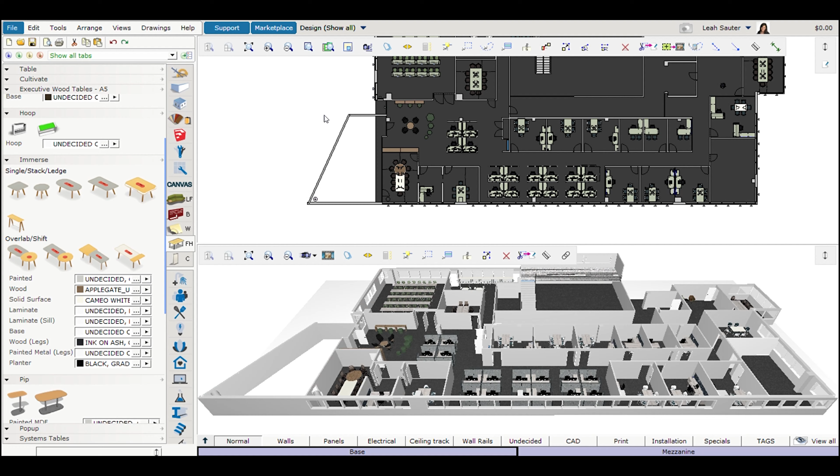So I just say make your drawing transferable to others, use clear communication. Now that we're in the CET drawing, I've identified some areas where the drawing tends to fail me as far as getting into the SIF accurately. One of those areas is finishes. I cannot seem to get it 100% of the time. I think I option everything out, I use schemes, and inevitably there's some little undecided finish somewhere in one of my symbols. This is very common, it happens a lot.

It basically takes you first being aware of this and caring, instead of going back into your SIF file and updating that finish, putting in the time up front and finishing it out right in that drawing. Just remember that as you go. Try to get in the habit of that.

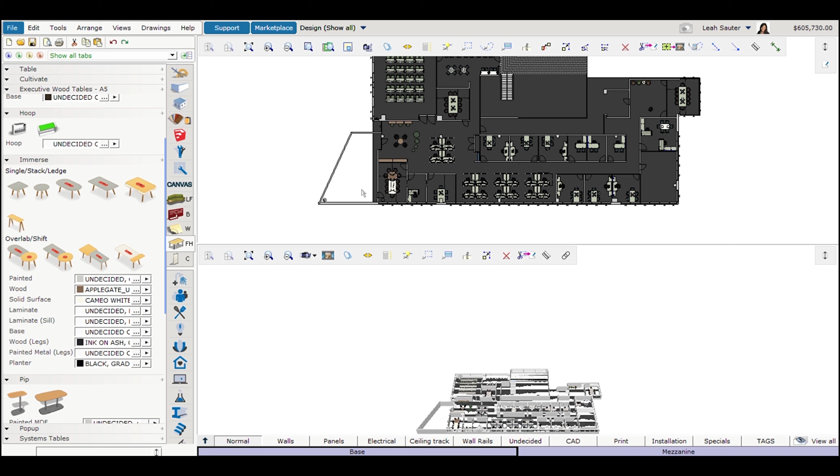Going through, I like to use the validate box. It should be called validate in any software - I'm a Haworth user so I have a canvas tab, but you'll have something maybe a little different if you're not. It should be called check project or validate project. This is where you can really see the status of how that SIF file is looking. In this case, oh no, I swear everything's optioned out. If you look at everything, it all has a finish, but inevitably there's an undecided option.

I click on it, it brings me to this table. That's the culprit. When I right click on it and query it, I can see I chose Applegate, but I chose the wrong Applegate - I chose undecided. And I know that's not what we want.

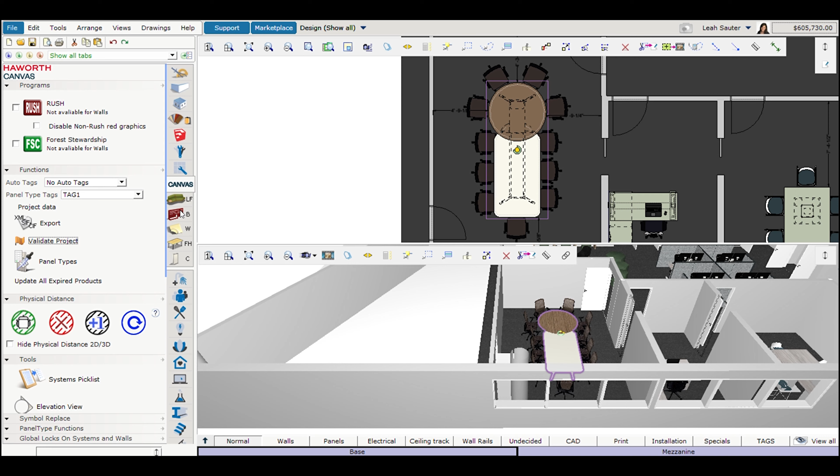So I'm going to go in - you probably have your own way that you update finishes, we all probably do it a slightly different way. I'm going to choose the right one, hit apply, and apply it. So now when I right click and query, there we go, all optioned out.

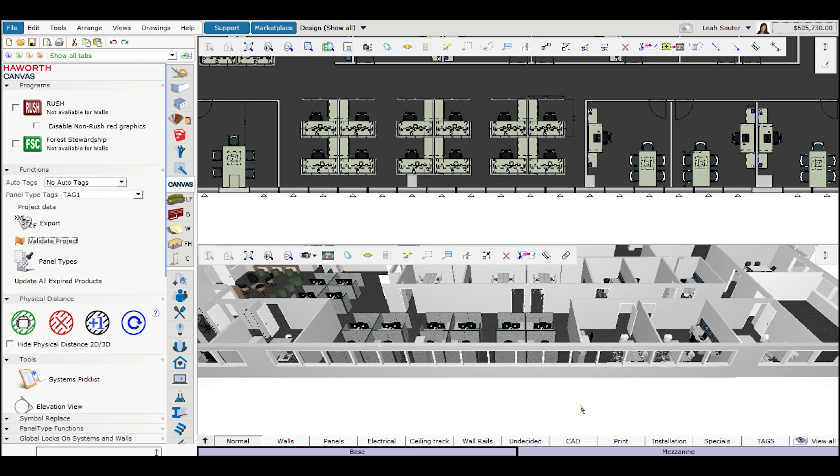So you would basically go through the check project or validate project and make sure everything is filled in. Now sometimes it'll say, see, one of 71 - this is just a warning about railroaded fabric, so I can ignore that because I know I've chosen all railroaded. But if it says one of 71, don't freak out. It's usually something like a panel tile or work surface you've used 71 times, and if you didn't finish it out one time, you probably didn't finish it out all the other times.

And if you go to schemes, you can definitely solve that easily. So you can fill it out here. One other thing I want you to pay attention to in schemes is apply to. I've been using a lot more selected group. If you apply to all, it does just that.

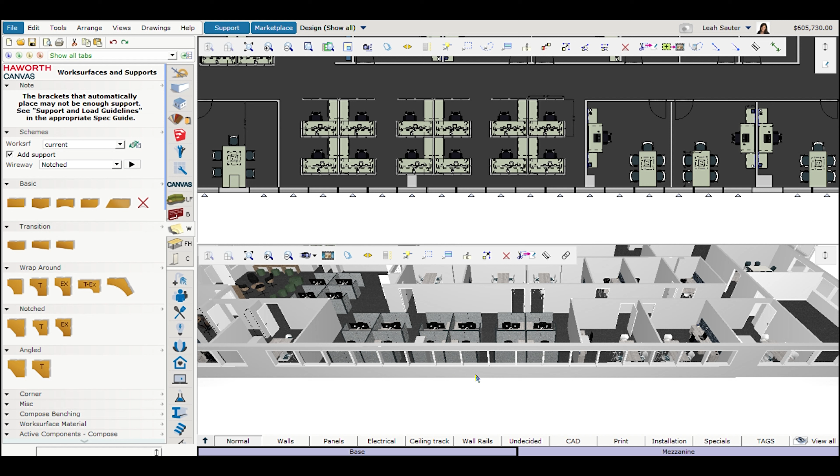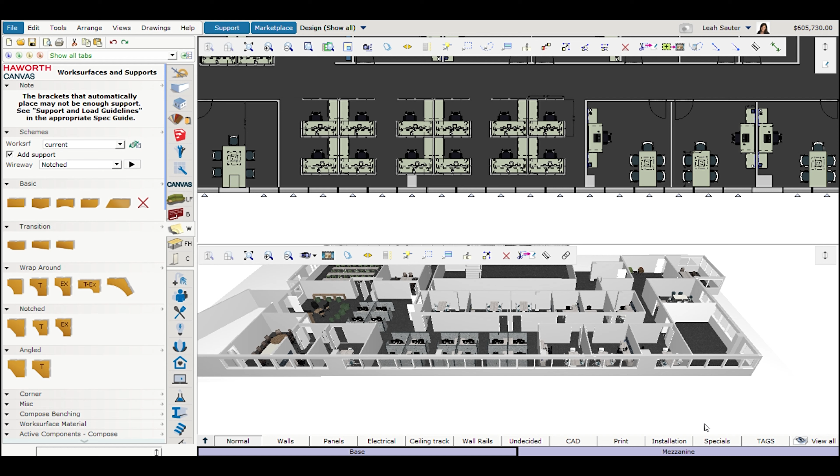Anything in your drawing that is a work surface or under the work surface tab is going to get these finishes. So think when you do tables - sometimes in the Haworth line, say you'd use planes tables, there's conference tables, there's training tables - you might not want those to be the same. In that case, I'd really use selected group, and that's when you just select the group like before. I do it usually before I'm in the scheme.

Okay, but you can do it during and hit select a group and apply it to just that group. It's really helpful if you have conference rooms that are different finishes or whatnot. If you don't hit that and you hit all, you're going to get everything. This overrules anything you have chosen.

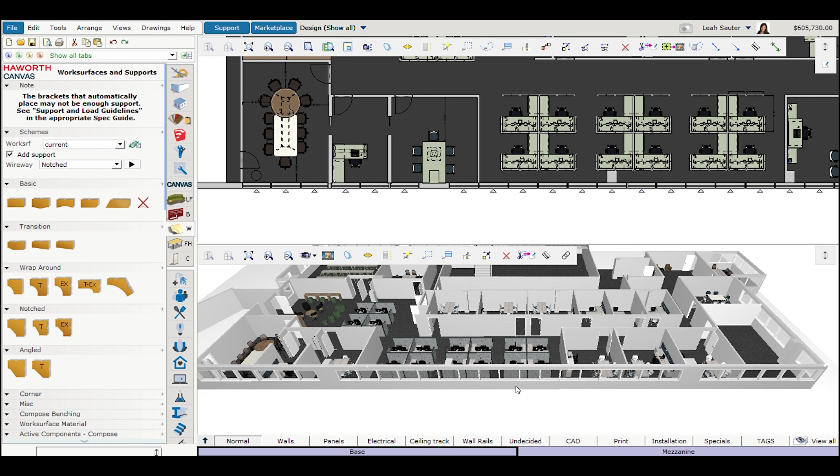So be careful, I'm sure we've all made a mistake in the past with that. It's so awesome until it's not and it turns on you and you forget about something that was supposed to be a different finish. So if that has happened to you in the past, if you've been burned, I do recommend using the select group. Sometimes I use it even when I have all the same panels. I'll just hit select group, then highlight all my workstations, and do it that way. But it's up to you.

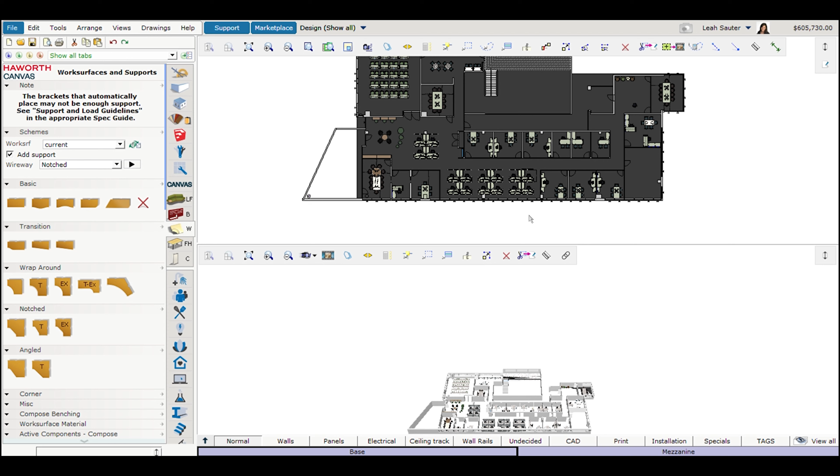My point is take the time up front, try to get all those finishes filled in however you do it. And then when you go to run your SIF file, all those finishes will be in there. I am aware that Project Matrix has the autofill of the finishes. I've used that in the past. It's a great feature, but I still don't think anything beats getting it right from the get-go.

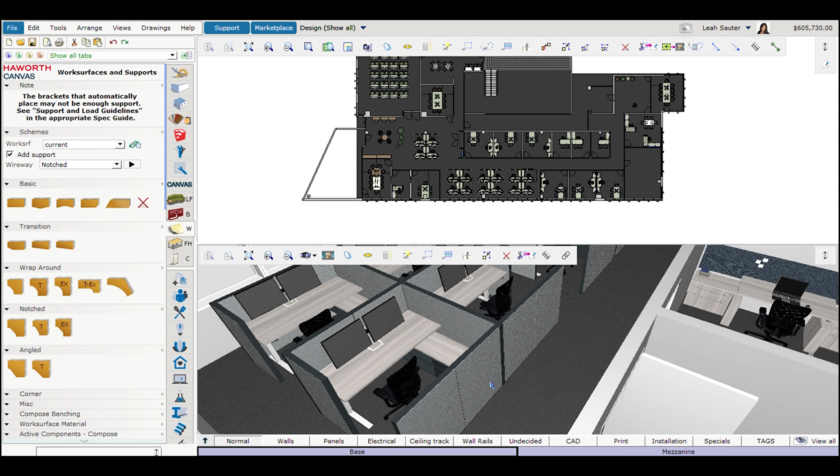And another note I'll make on that - we're designers, well, not all of us, but those of us who are, it is so nice to see finishes applied. I feel much more designery being able to apply finishes in here and actually see them. And no, they're not the same as real life, but at least it's an idea of what you'll get. So if you're not doing it in here, I highly suggest you do. It's a little bit of a missed opportunity if you're just doing it in your SIF file.

Don't pay attention to these finishes, they're weird. I don't know what happened - this is a real project that got installed, but I was playing around with this stuff for this presentation.

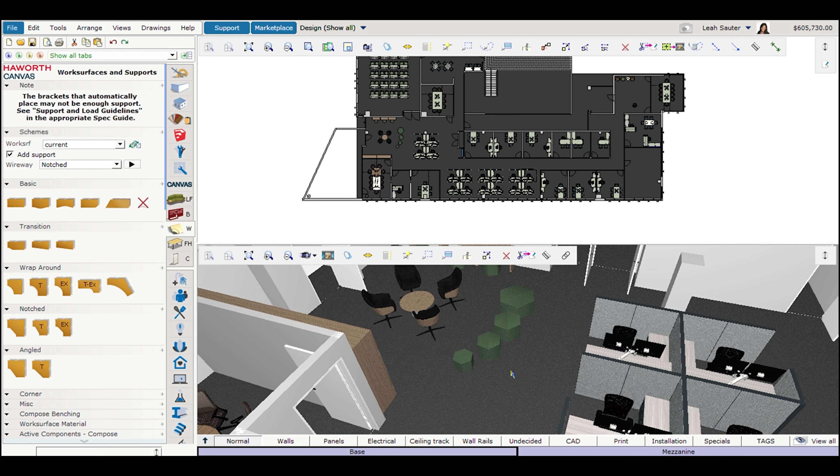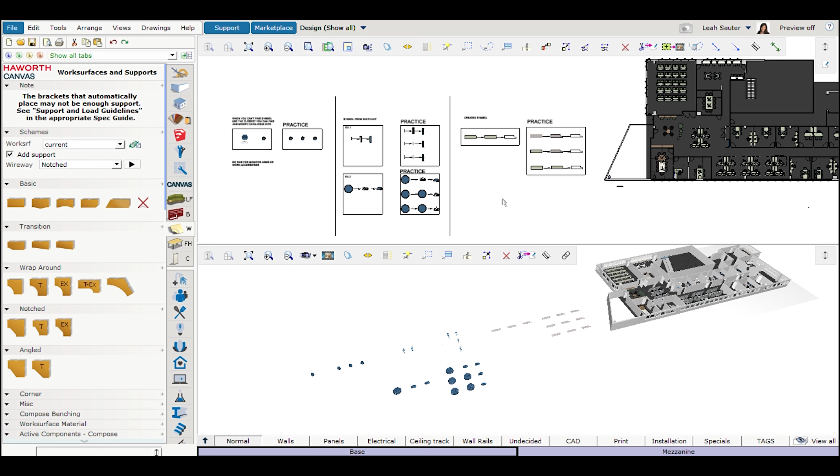Okay, so that's finishes. The next quirk I notice is, okay, how often do you have to bring in a symbol that is not in CET and it's not in whatever specification program you have? Like for me, it's Project Symbols, Project Matrix. So what do you do?

You can bring in that symbol, you can go on to SketchUp, you can find that symbol. But then when you run that SIF, it's not going to be in there. And now you're doing what I advise not to do - you're going back in, you're adjusting that SIF file, and you're basically creating a breeding ground for error because you're messing around with the SIF and you're a human being.

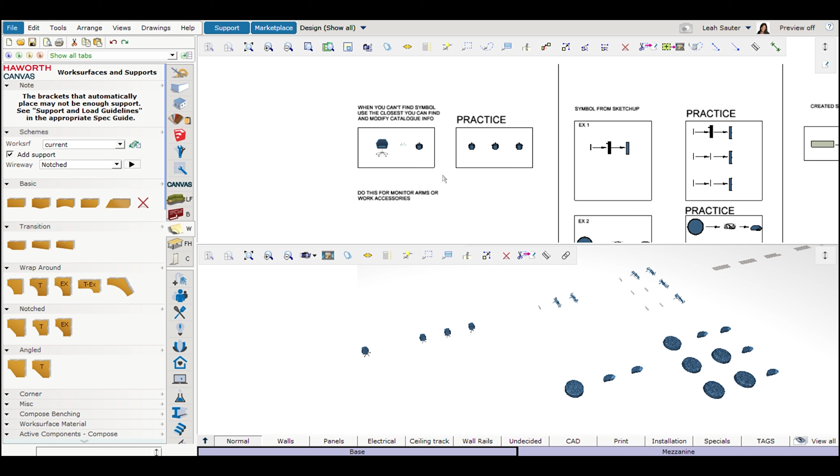So here, for example, let's start simple and basic, and then we'll go a little more advanced. Here is a Level 4 chair. Level 4 is not in CET and it's not in Project Matrix - I actually don't know if that's true, but for this example, let's just go with it, I could be right on this one. The customer already loves this chair, we're going to use it in the project. But what do I do? I don't have a symbol for it.

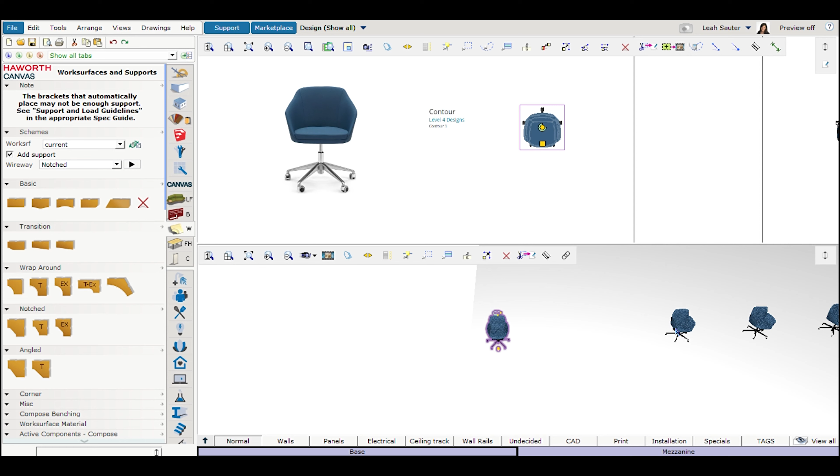So in this case, I was able to find a chair - this is a pretty typical looking chair, I was able to find one that looks very similar. This is a Haworth chair. So as I pull it in, it's going to have, let's look, all that Haworth information. Oh yeah, so that's not good - now are you going to accidentally order the wrong chair?

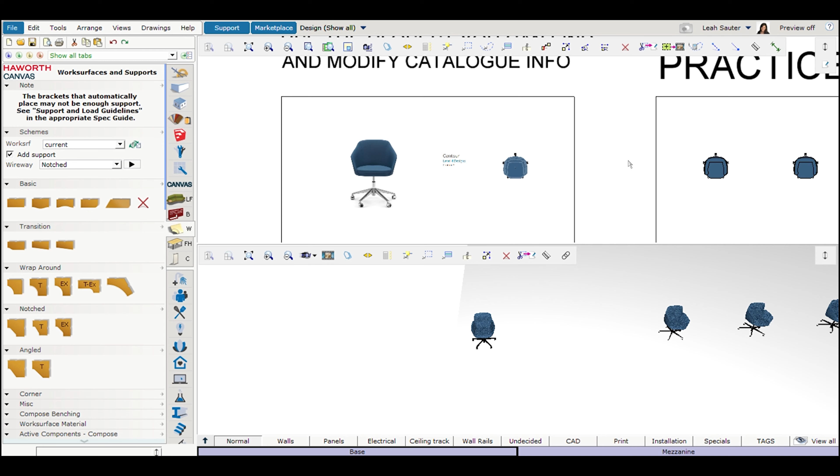It could happen, if you forget to go back in your SIF and change it or whatever. So we want this chair to have the correct catalog info, the info for this Level 4 Designs chair. So I basically use the right click and query, like I use for so many things, and then I hit Make Special. You guys should all have the right click and query or something very similar, no matter what manufacturer you use. You also should have a Make Special, but it might have slightly different verbiage - look for something that looks like it, because it should be very similar.

And this is where, I will say, it says Make Special, but don't think of it like that - that really narrows in the scope of everything. If you think of it, pretend it said, and maybe the developers will eventually do this, but pretend it said something like 'modify catalog info,' because that's what you can do here. Once you realize that, it really opens up the door to so many possibilities.

You go in, and this is where you modify whatever you want the product to say. You can change the part number, description, price. The only quirk I can't get with this one is the catalog code seems to revert back to SPC - it thinks you're trying to make a special, so even when I change it, it goes back. Hopefully we can feature request that to change. The manufacturer code I think does change just fine.

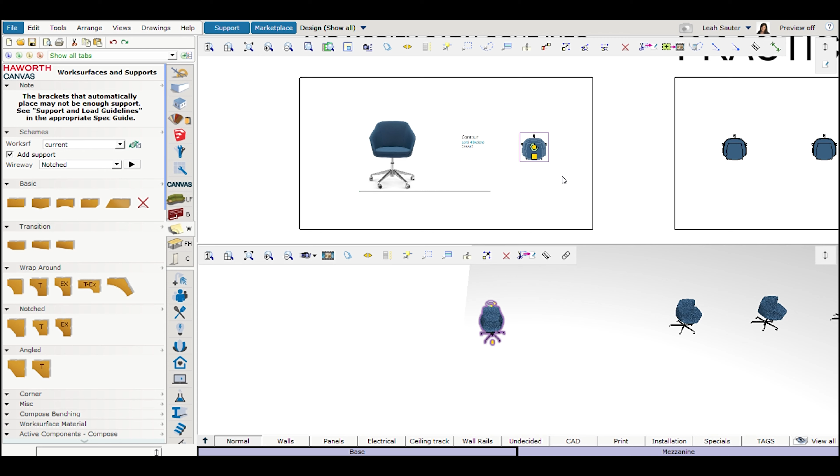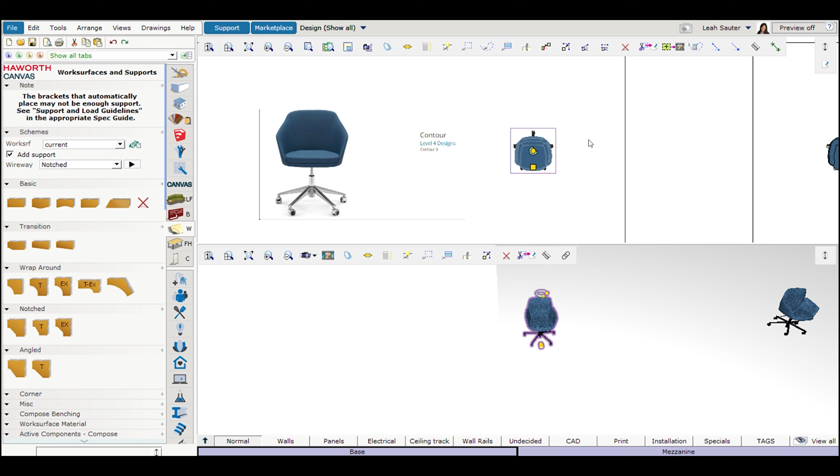So you hit OK, and basically it's exactly what you would do if you were making a special. And then when you query it, it will say all the correct information. So then you can copy that symbol out and use that symbol instead of nothing, or the wrong symbol, or just some empty symbol without any catalog info.

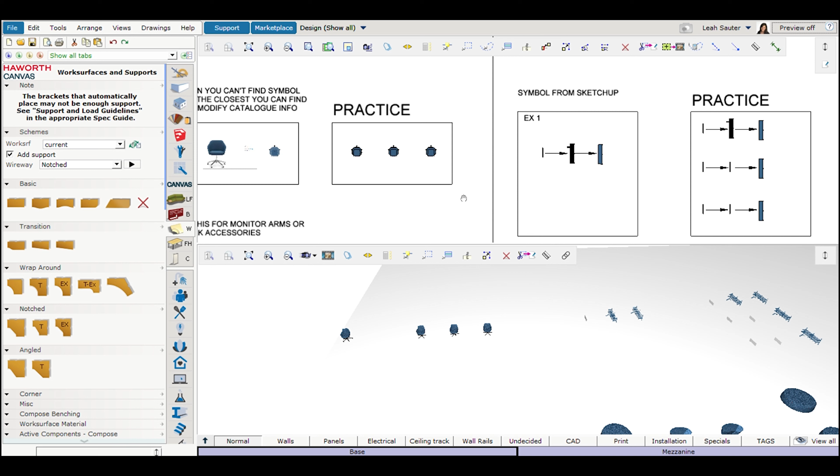Okay, so that's kind of the basic approach. If there's a symbol that looks very close to what you want, just use that and modify the catalog info.

Do you guys like to bring in symbols from SketchUp? I do, I think it's cool. It's fun to see what's out there. A lot of times manufacturers have SketchUp symbols on their websites. Sometimes when I search SketchUp it doesn't always show up, but if I go on their website it does - I don't know why that is. But say you found the perfect symbol in SketchUp.

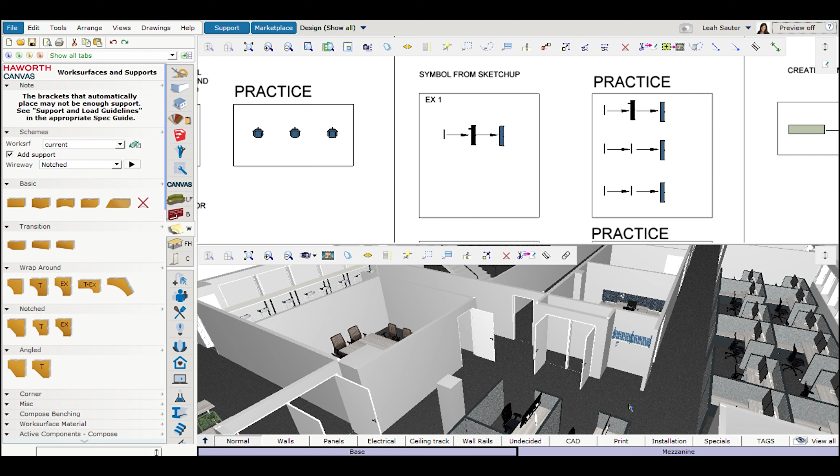This example I have here is - oh, one more thing before I continue. On that chair, you'll notice, hold on, when I query it, it has the same number of finishes as the level 4 chair. Well, you wouldn't know that, but I'm telling you it does.

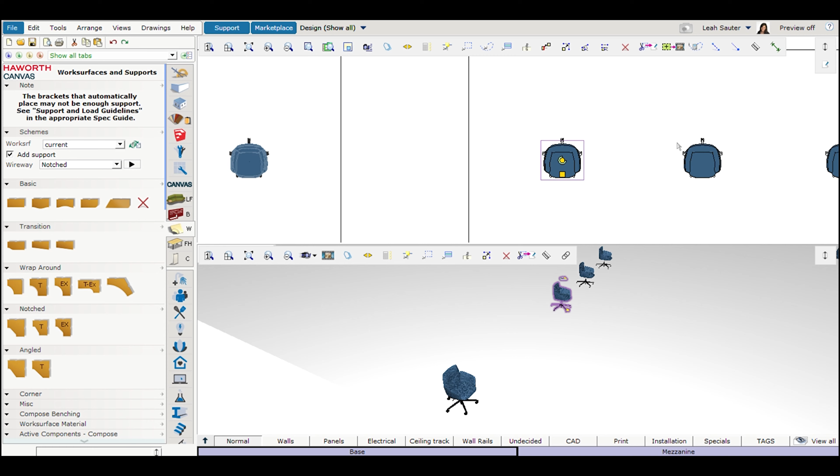That is what you're shooting for. When you bring in that symbol, you want to shoot for a symbol that has the same or more finishes in the finish string, okay? Because that allows you to actually option it out. If you don't, then you're not going to be able to option it out fully, to make it so it can go from drawing to SIF file without touching that SIF.

You'll have to go into the SIF and change the options. So try to find something with a finish string that has the same, or it can have more - more means you just delete what it says, so you can be fine with more. But when it doesn't have enough, then you start to run into problems. So try to keep that in mind.

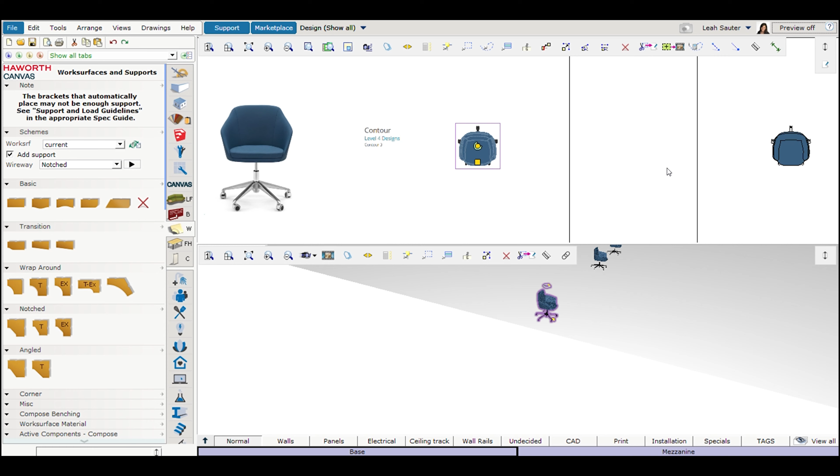There's this beautiful little button here on my right click, 'also add catalog info.' You might be thinking, why isn't she just doing that? Right now, CET does not allow you to option it out using this feature. So again, this is something they could have in the future, but right now you can't do it. So I don't advise using it, because again, you'd have to go into your SIF file and adjust all those options. If there's a way to do it in my drawing, I would rather spend a little bit of time to find that way.

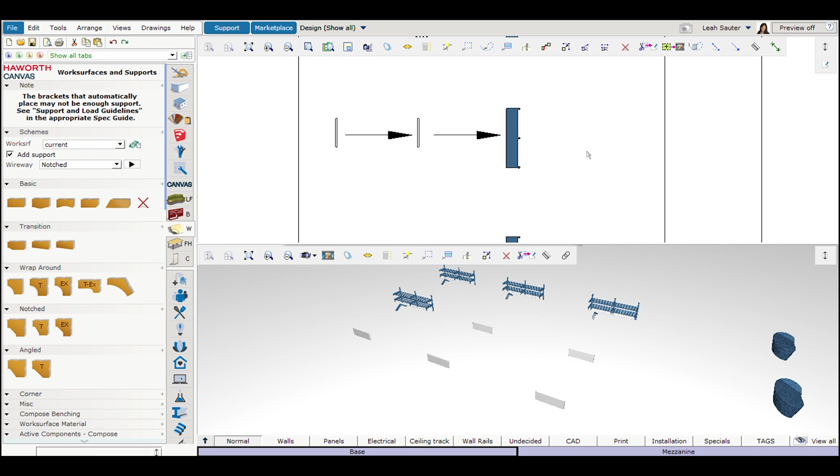And it's kind of cool because once you figure it out once, the same things just keep coming up quite a bit. Once you figure it out once, you've got it, so you can just do it every time. It's not like you're recreating the wheel every time.

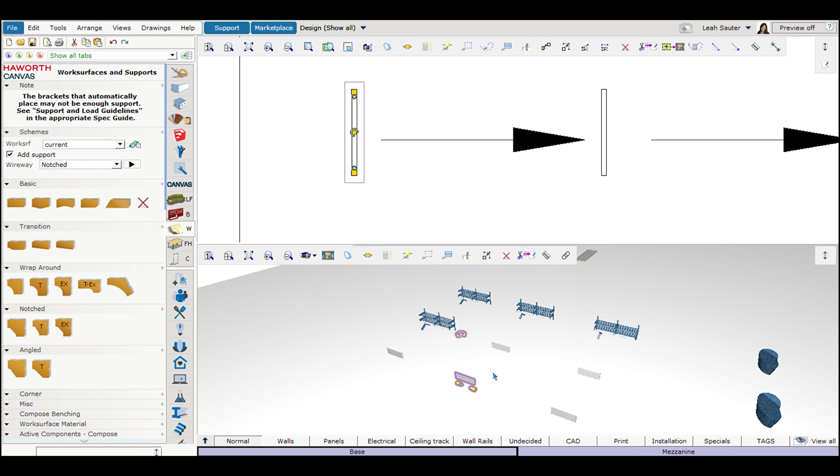So you have the symbol you want to show. What you do is pull in a random symbol - I'm using the Haworth Belong tile. Again, look for something with a finish string the same or more than the part you want. It does not matter what it looks like - it can look nothing like the symbol you want. You're not going to see it, you're just using the data for it.

So then you're going to go to your next step and do exactly what I showed you before - query it and make it have the data you want. Correct all the catalog info to be what you want: change the price, change the part number, all of it. In this case, there's only one finish in the finish string, so I only needed a part with one finish, so I've changed it to blue.

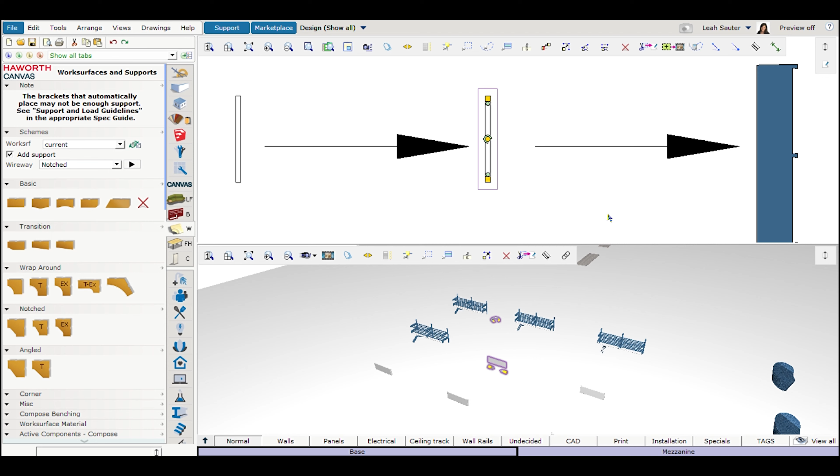So that data is in this symbol now. You have the correct catalog info and you have the correct symbol, but you need to merge them together. So for this, I use Edit Graphic Symbols and go to replace graphics. The way I remember this: always click on the part you want to see, then the smarts you want it to be. Click OK.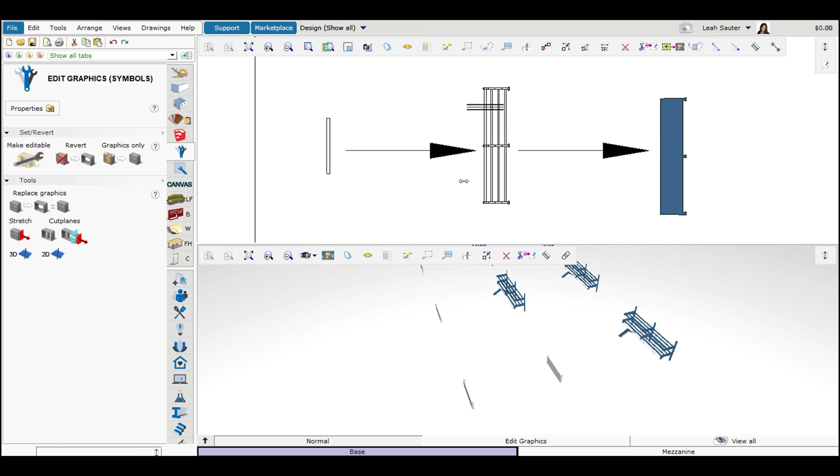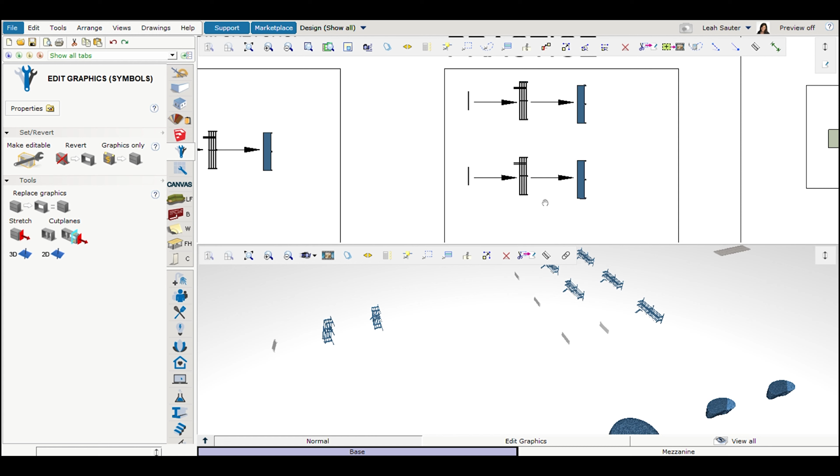Now when I right click and query this, there it is. I've got the correct catalog info, I've got my option, I've got my price. The only thing I don't have is that SPC thing, always getting in the way, but that's okay. You can do that for any of those SketchUp symbols or anything you bring in.

I will do it again, actually down here. I've taken it a little further because we all know in these tutorials things seem so simple, so clean cut, but then you go to do it in real life and there's inevitably some issue, or yours is more complex. So I was trying to think of where I get tripped up a lot, and I think a COM would be just that.

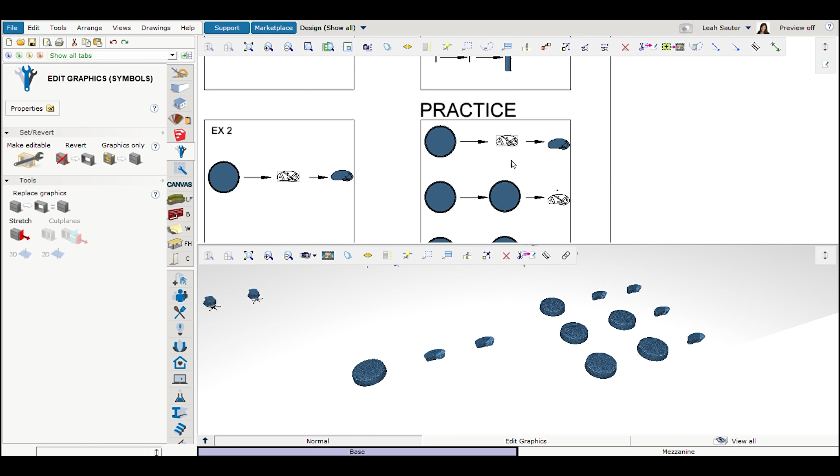I haven't been using a ton of COMs. I think so many fabric manufacturers are grading in their fabrics, which is great, but say you have a COM, it still happens all the time.

So the example here is a high tower bench. You've pulled it in through SketchUp, and you're going to do the same thing I just taught you, where you'd find a like item with the finish string that was similar or the same. Then you're going to make that symbol a special. I think I already did it here. Yep, so we added all that info we wanted.

We changed the finishes to what right now just says COM in the grade, because what we want is when you do the SIF file - typically how we do COMs, and I think it's pretty universal - you want your line item for the sofa or bench, and then a separate line item for that COM fabric if it's not a graded-in situation. But how do you do that when you just have the bench, you know?

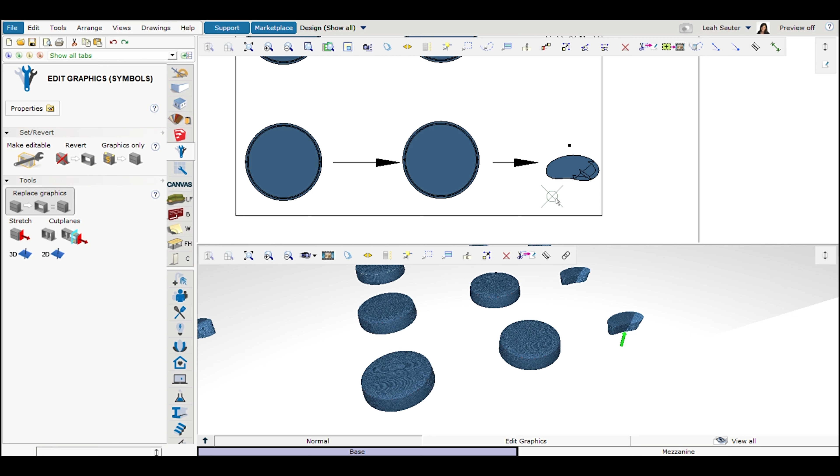So I would basically fill in COM, and then do that same edit graphics - replace graphics, click on the item you want to see, then the smarts you want it to be. Hit OK. So now this will have the correct catalog info: high tower plasma bench.

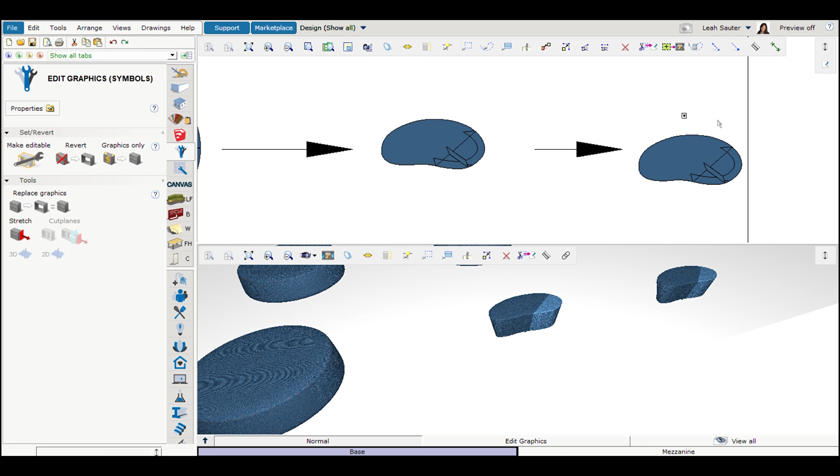And then to get that COM line - this is so random and kind of weird, but it has worked - I pull the tiniest symbol I can find. It's a bezel power module. I modify that using the exact same method: right click and query it, then make it a special and say what I want it to say. You can also add a pick list and put your fabric in that way, whatever you're more comfortable with.

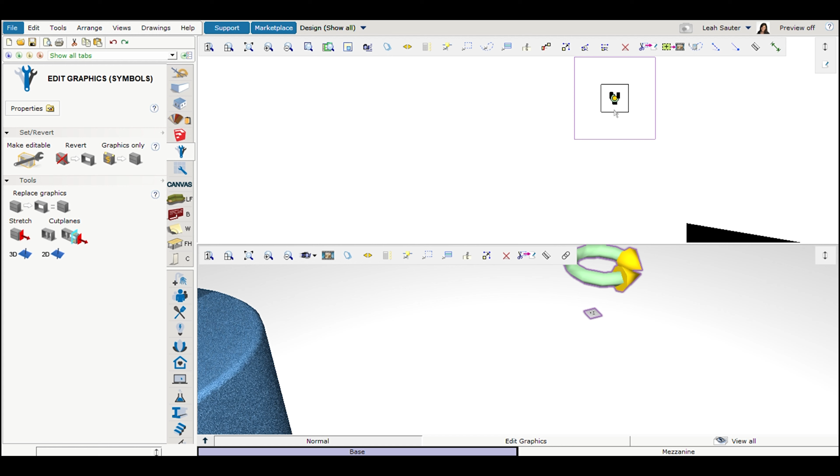I'm more of a symbol person. I don't know, maybe I'm just more visual, even though it's not even meant to be seen. But yeah, you modify it here, click the correct price, okay. And now this little bezel will have your COM line.

One other thing I need to note: don't forget to delete, delete the original, delete the originals. You really don't want to forget that - it could really be problematic. So now you have that bezel right in there.

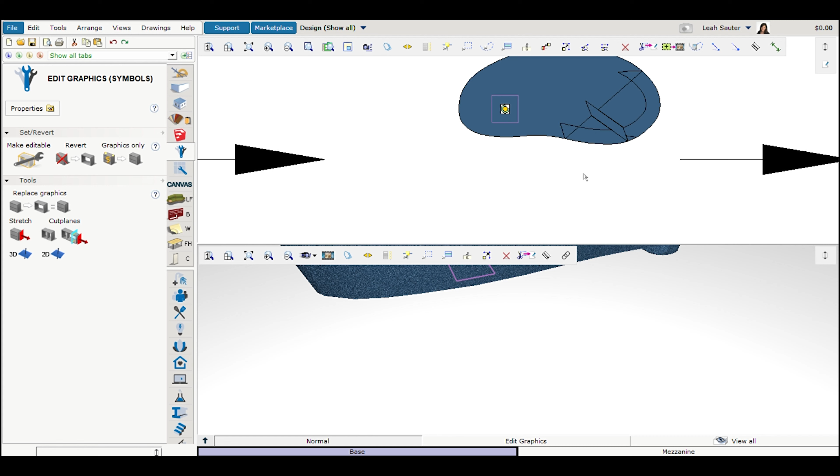This is great in that it comes in at elevation of 0, so you can really hide it. And then I actually like to create a block out of this. So if you highlight it, right click and create block, and you can label it 'high tower bench' or whatever the label is. Now that COM fabric is staying with that bench.

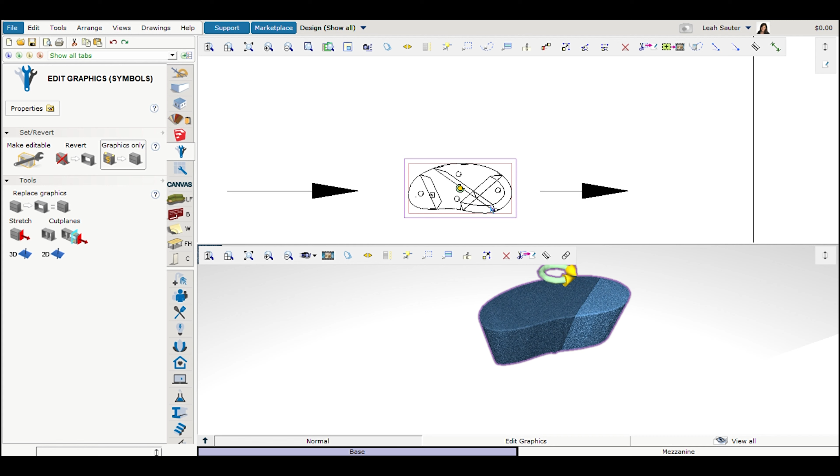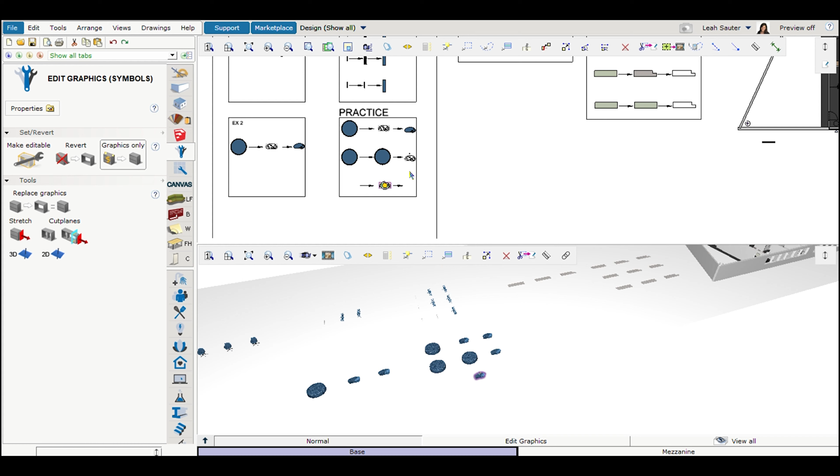It's still going to be two separate lines in your SIF file, but you're not going to have this random bezel off to the side, or when you copy that bench again, you'll actually grab the correct items - you'll grab the COM with it. So it's just one step further, but it can be pretty helpful and can help you not have to add that COM line after the fact.

This is just the same example, a different take on the same idea. I used the custom shape tool on this one, just playing around with it. I really want to get good at that because you could create anything if you think about it.

With the custom shape tool, you could create any visual you want if you were really good at it. And with the replace graphics feature, you can assign any sort of catalog info you want. So together, those two things, the world is your oyster. You could do a lot.

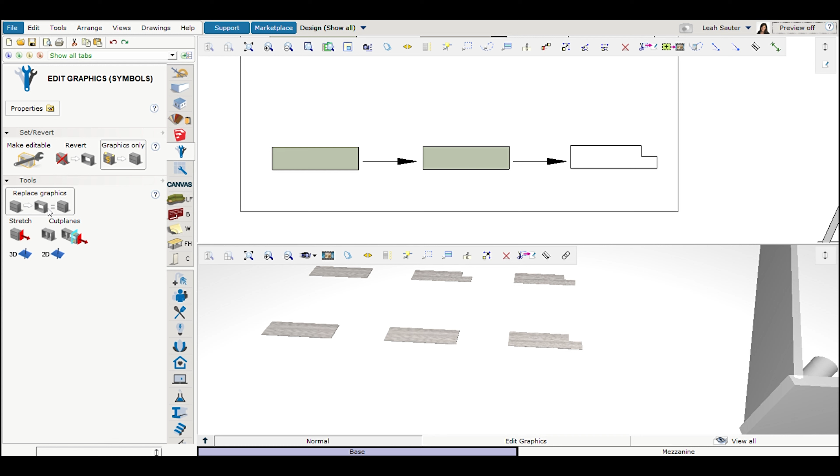So I'm going to query this. It's a Haworth work surface. The customer wants it cut around a column, not in the field. It's actually a special we're going to order, so I'm going to modify it to be the correct special number, fill in all the correct data, hit OK, and do the replace graphics feature. Hit this, click on the part you want to see, then the symbol you want it to be, and hit OK.

That's just where, like the rotation, if you want to change how it aligns and rotates and all that, that's where you can do it. I never typically touch that, but you could.

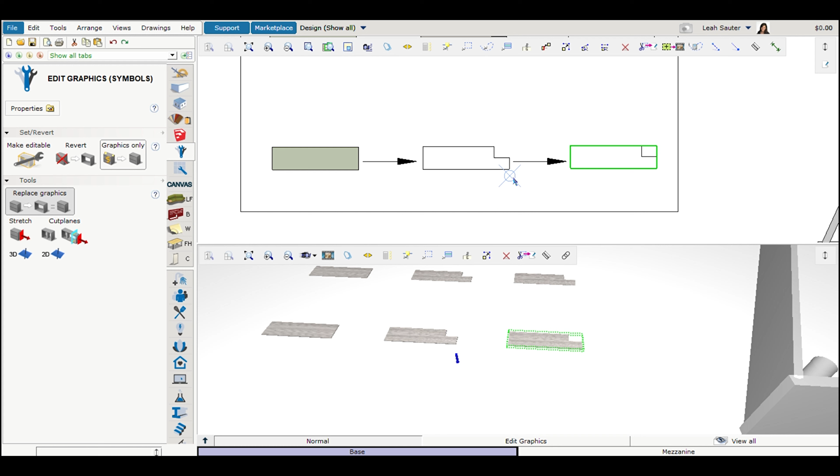Okay, so now we have it here. Right click and query - it's the symbol we want with the information we want. It's pretty great. All right, so that is the big one.

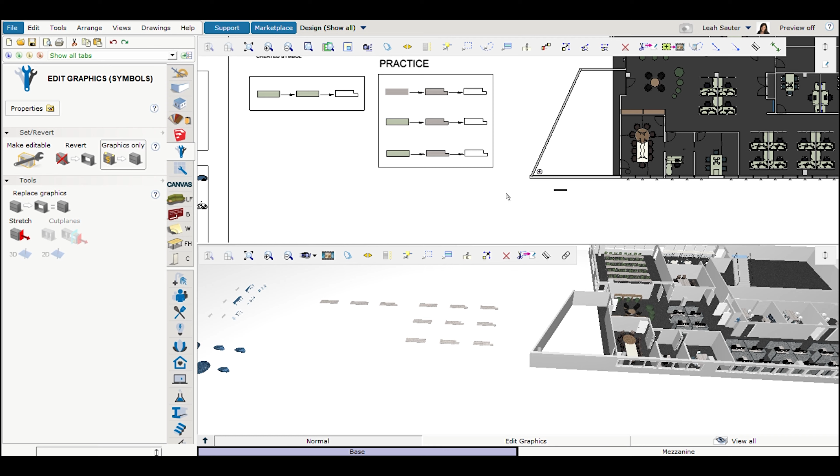It takes a little practice. It's a little quirky, I understand, but once you get it down, it's pretty awesome. To me, it is so worth spending the time up front to get these symbols in there and get them right. It can drastically reduce your errors, you guys. It really can. So try to get those drawings as accurate as you can.

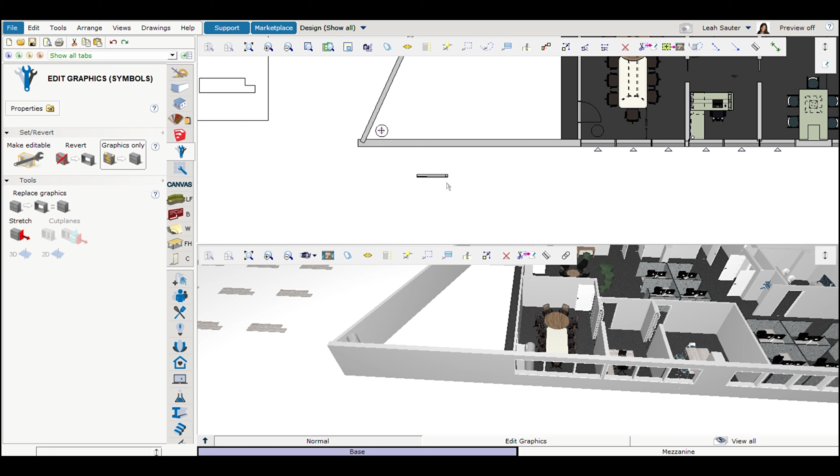Another thing I want to mention, and I mentioned it before, is pick lists and favorites. I use them, but not that much. When there's something I forgot to put in, I'll throw it in a pick list just so it at least gets in my drawing, so I know if I were to run a SIF, it would be in there.

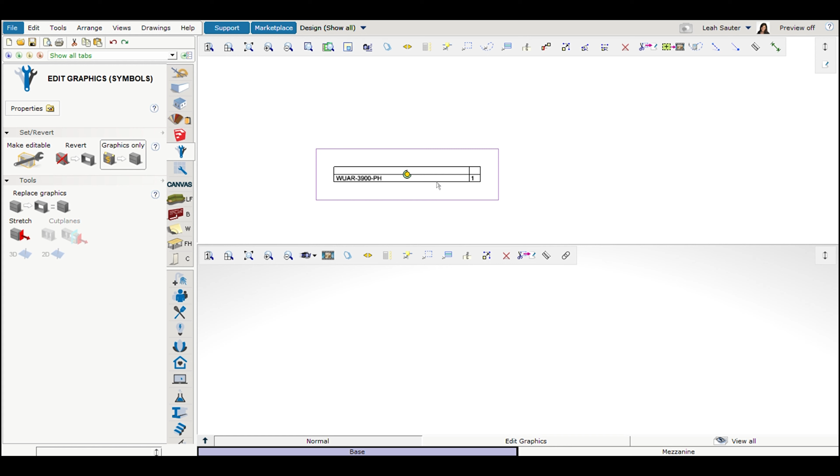For us, it's in the Canvas tab - it should be in whatever your manufacturer tab is. You throw that pick list in. I never put the border on, I just double click on it. You can do it by searching or by typing, and then you can change the quantity in there. So anything you really don't need a symbol for, use a pick list.

I think I was using the example of a reinforcement channel. Say someone does a double check and says, Leah, you have some 60-inch wide spans on some work surfaces, I recommend adding some sort of support or reinforcement channel or something. And I say, good idea, let's do it. So instead of just modifying the SIF file,

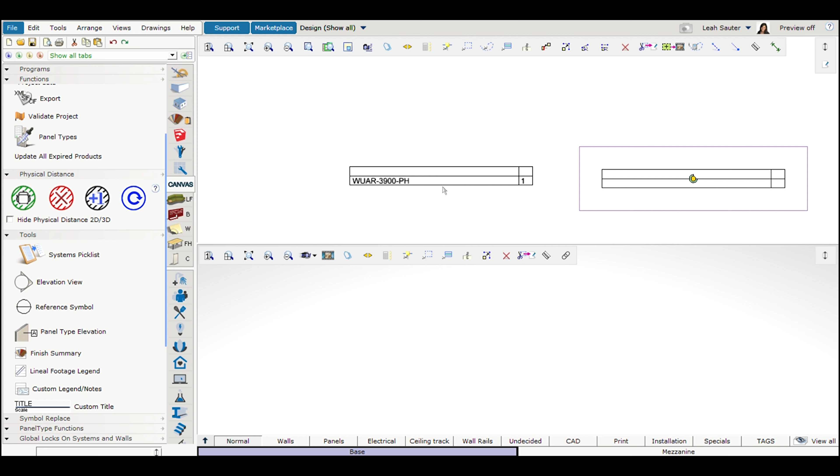You would... it would be a good idea to modify... I'm sorry, my husband was trying to say something to me. Just ignore that gap of time.

You would add a pick list and then get it in your plan, so it's all in there. So if you're in that SIF, it would be in there.

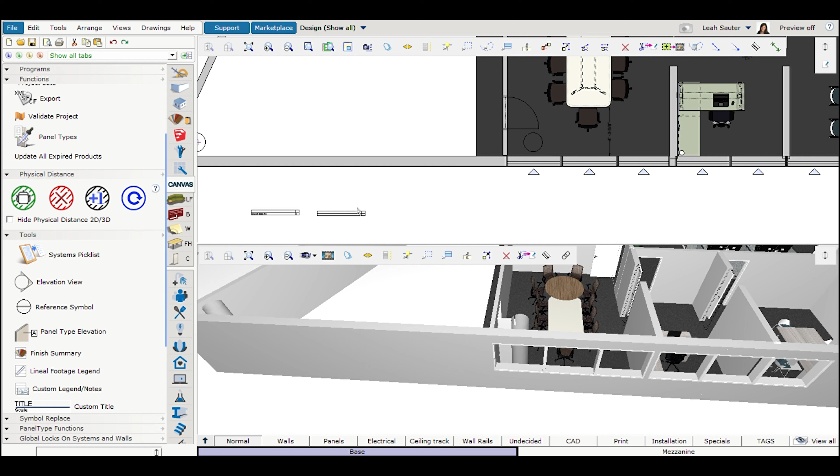I do something similar with favorites, for things that are small or where the symbol just bogs down my drawing, like sometimes even with monitor arms - though actually, monitor arms can go in a pick list if you don't want the symbol. But favorites I use a lot with L sets. I forget my L sets more often than I care to share, not proud of it, but it happens. And if you don't know L sets, they're lock sets.

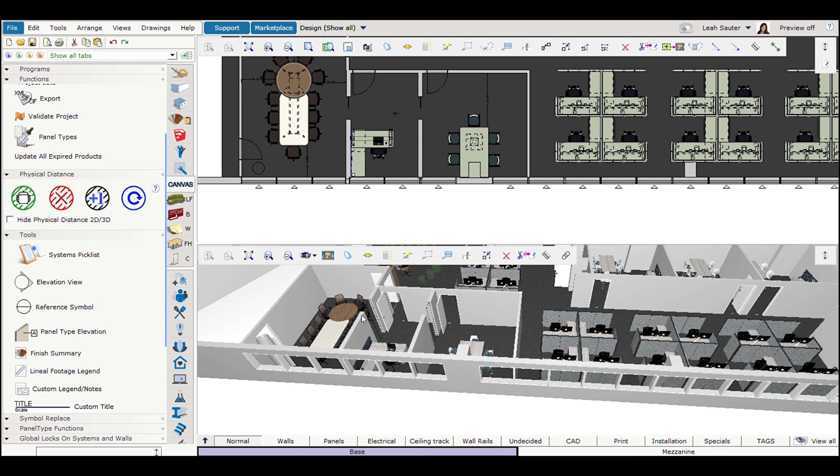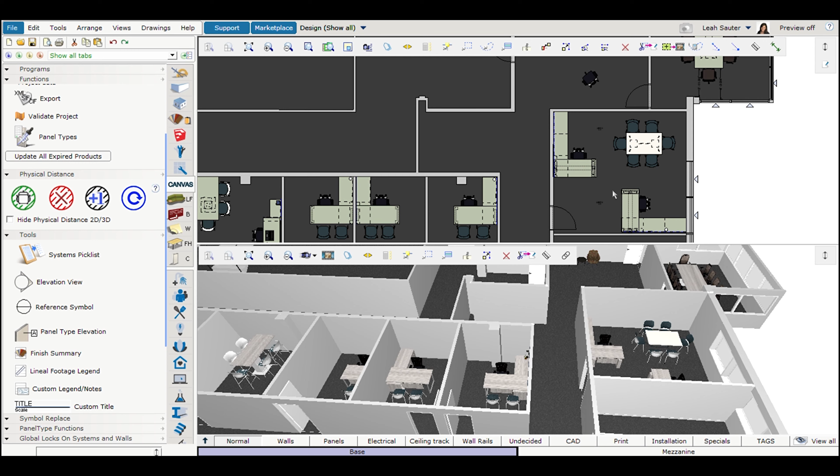Maybe it's just a Haworth term, I don't know. But I have these all saved in here so I can go and pick which L set I want and then just drop it in the room, so that when the install happens, it's all clear where each L set is going. Here's one, and I can copy it out and keep it going. So not only is it in your SIF file, but it's going to be all set for install too. Just do it once from the get-go, and the whole rest of your project will go a little bit better.

That's it for pick lists and favorites. My other note is to communicate, communicate, communicate. This drawing has no voice. The drawing speaks for itself. So when I first think of this, I think of very basic.

Look at your saving structure. Make sure your design team has the same saving structure, a uniform saving structure. A few years back, we converted ours because we were a little all over the place. It takes time to develop these things. So now we're nice and in sync with each other.

Our structure goes: we have the proposal number, the floor, and then the rendition. So A, B, C, D, and so on. And the rendition changes when the customer makes a change.

So if you go into someone's file, like I was saying earlier, if you win the lottery and you're out and someone's going into your file, do they know what's appropriate to SIF? Do they know what status? Do they know what drawing to pull up, and what status it should be? So whatever your system is, it doesn't have to be what we use, but come up with something that's universal that everyone in your company understands. I know that if there's a drawing A through F in this file, F is the latest drawing. In our design department, that's just how it works, and it's great.

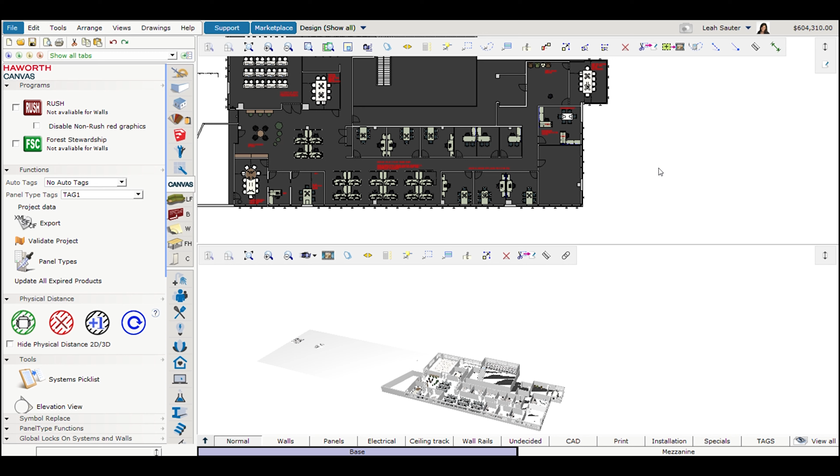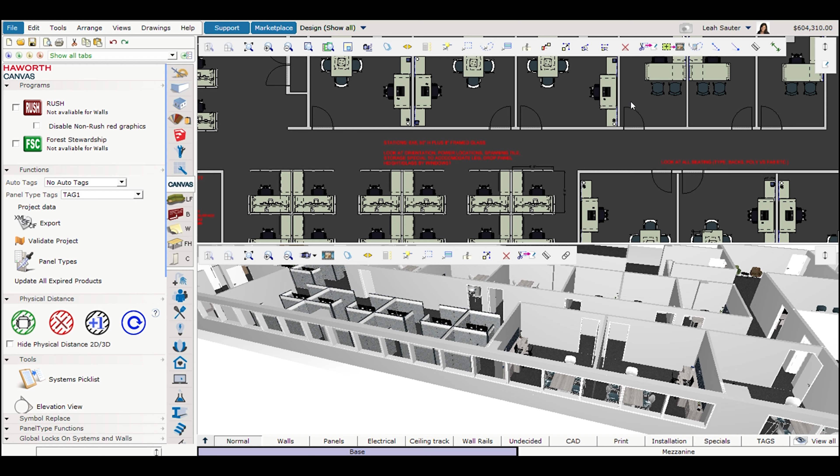So this has notes from the meeting. By the way, I do like to do my notes from meetings right in the plan because it's another way to keep that drawing more accountable. Once you do your notes and have your different alternatives and all that, just say what it is. I don't get crazy technical here, and you can if that works for you. I just kind of say what's going on, and I try to use things like dates.

And then on this one, I make sure to say important things like do not use for SIF. It's also showing notes for people if they went in, like don't SIF it out as is. And then this is one that is updated and validated: used this alternative for SIF on 10.8.

So ideally, when you're done or getting to the point of siffing something out and ordering it, you would go into your latest drawing and delete all your alternatives. You don't need those - they're in your previous drawing. Even if they change something, if you're on rendition F, it's going to be in D or one of your earlier renditions. You can grab it from there. Don't get this super heavy, slow drawing going because you have all these alternatives you're afraid to delete.

That makes it easier in that, like right now in this drawing, if I was ordering this product, I would probably just delete these ones and keep layout C. So then there's not even a question of what alternative should I use.

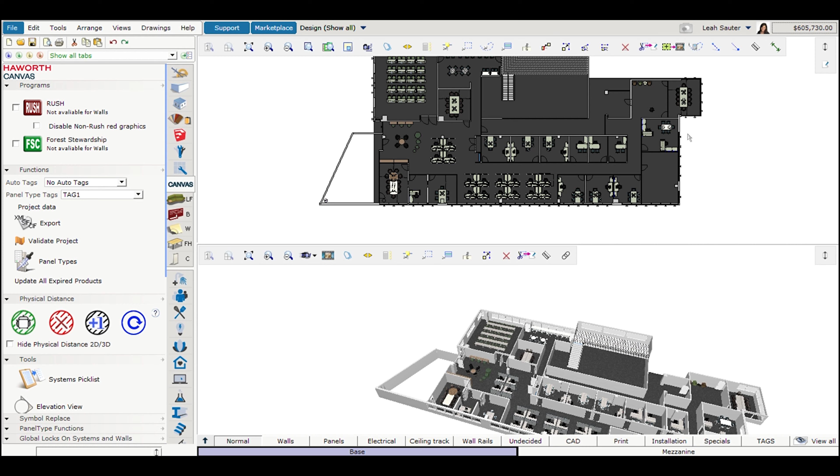One more thing I want to note on the communication part: there's a revision history extension in the marketplace. It's free, try it out. It is very helpful in showing - kind of like the old CAD where it shows a date of modification, who did it, what the revision was. So it does kind of keep track of any of those changes that are made.

And some of these projects we have are huge. There can be a lot of changes. So a way to track those changes, not only to your group, but just to yourself, is a great tool to use. I encourage trying that out.

Last thing I'll say is do not be afraid of the validate or check project button. I was always afraid of it, now I'm into it. And look, I do have a drawing - that's a warning, railroaded fabrics. It's just telling me I have railroaded fabrics on my 72-inch panels, reminding me to put it on the other panels. It's a great little reminder, but I'm good, I already checked it, no need. I can exit out. So don't be afraid of that validate tool.

Use it to help you go through and make sure your SIF is up to date.